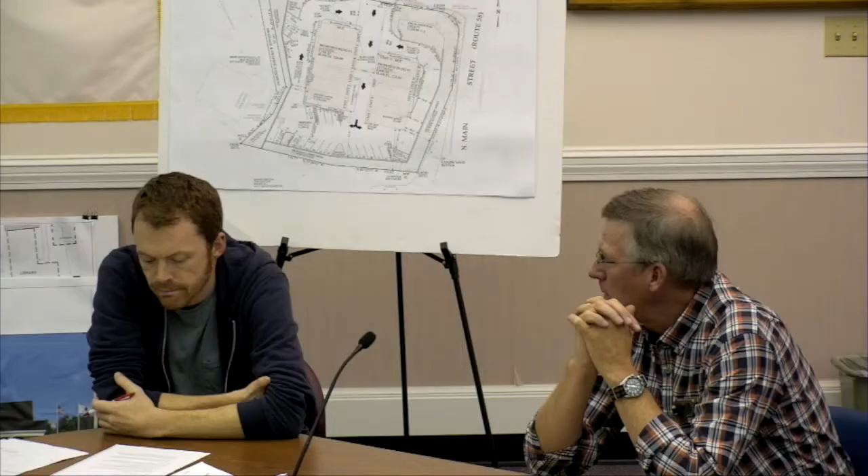Good evening, gentlemen. Good evening. Bob Kroll and Chris Leamy, drafter designer for Duxbury Construction. Do you have—I know that we walked and did a site visit last week. Yes, Jen and I were out there with you and Jim.

I know, Jim, you said you just received some comments from Andy Glines. Right, there are some final comments. Everyone now has a copy of that—it was the top letter on the packet that I just handed out. It basically consists of recommendations and stated waivers. There are no more technical corrections to be made.

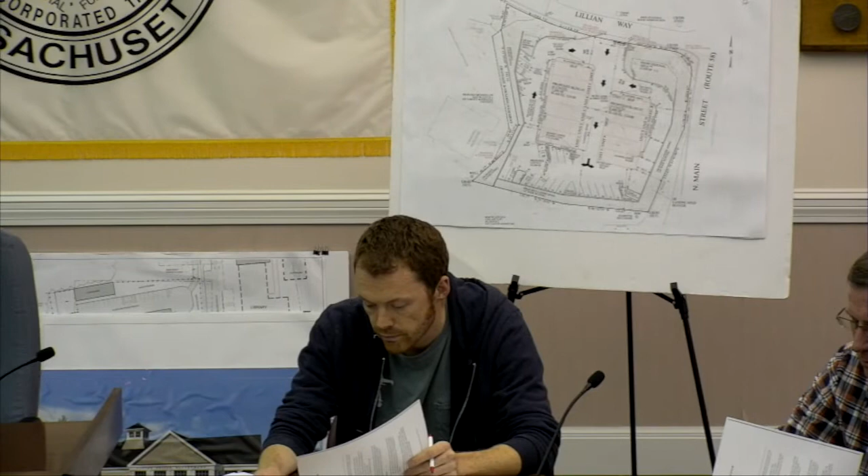Can we vote on anything tonight with this? We only have 3 members since Will is... Right, so for site plan review you're allowed to have 3 members, a majority of the board present, and vote on it. And you have to have at least a 2-1 vote in favor to pass something. Okay.

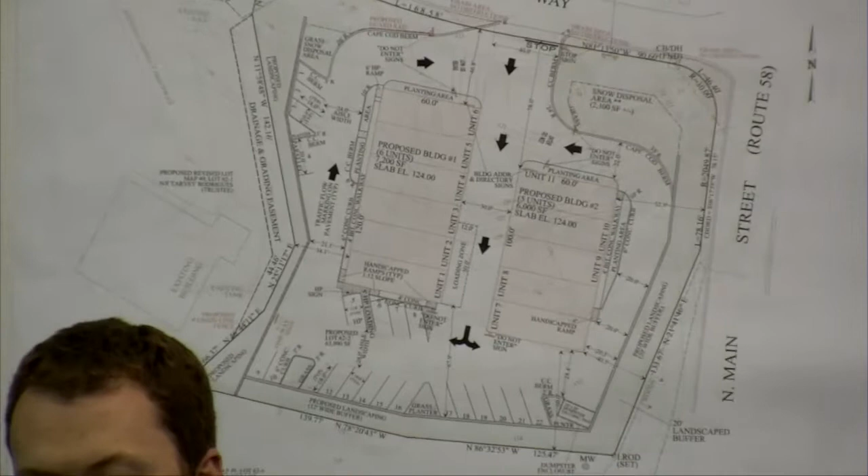All right, is there anything you people wanted to say tonight? You can just talk about the changes you've made to the plans. Exactly. So last time we met, you got a feel for the project during the site visit, and the one thing we took away was that you wanted beauty on the site. So outside of a few technical things Fuss and O'Neill pointed out, we had the landscape architect add more vegetation between the trees on the frontage areas. The trees proposed didn't actually fill up the space between the trunks, so you'll see on the landscape plan I attached for all your packets, all kinds of different vegetation proposed between the big trees on the frontage sides.

And then we also got them to update with plants that grow to a more suitable height on the two abutting lot lines.

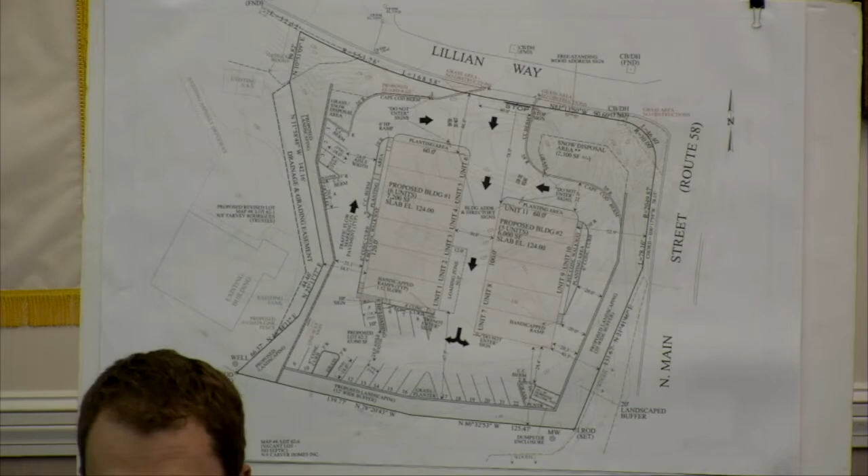So those things should grow to about 8 feet, and when you add in the slope and the retaining wall, there will be about 11, 12, 13 feet of building showing to anyone looking in, but we feel it's an adequate amount of screening, despite not having giant, big evergreens there. His reasoning was he can't actually plant those size trees on a 2-to-1 slope.

That's why he chose deciduous shrubbery and stuff to go on the inner lot lines. That's the biggest fundamental change since we last met. Everything else has just been correcting typos and adding bits of info here and there.

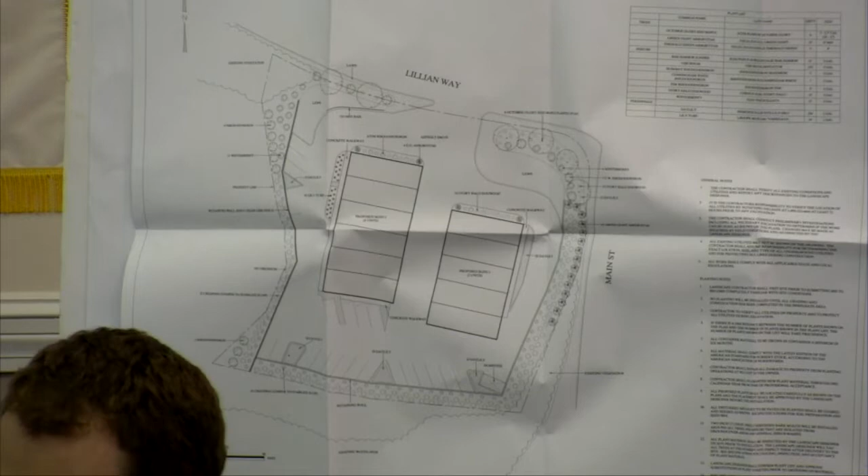So we have rhododendrons, winterberry shrubs, viburnum, creeping juniper, and out front we have red maples. And then we have a lawn in the back.

Any questions by any of the planning board members? I'm not an arborist, so while I recognize the names, I don't know what they look like. Do you have images of what these things look like? I don't have them with me, no.

Maybe, is there a concern that you'd like to have addressed? Really, it's just the visual, like you had said, filling in between the trees. But I don't know what these circles look like. I would like to assume that you did it, and it looks like you did, but without knowing exactly what each circle is. This was actually done by a landscape architect, not me, just in case there was confusion. We outsourced it to him and trusted him on it and his visual and aesthetic expertise.

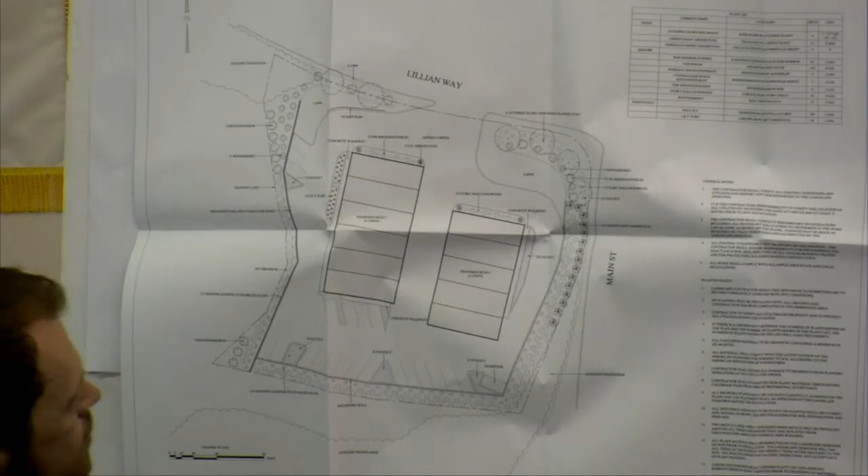Obviously, they said it. And same thing with the emerald giant greens, emerald greens, those are the green trees that kind of taper up. They're a little bit rounder at the bottom, and as they go up, they kind of go up to a bit of a peak like that. So they're good coverage. They have 15 of them. I don't know, I'd have to look at the plan to see where they're using them. Where specifically are they? They're on the side over here.

We're on the Main Street side. Yeah, I see that. So that's good for the street.

Now, did we have any neighbors that we were concerned about that were going to see any of this? We do have one - it's just another commercial building, used to be the old fiberglass building. You have Main Street, this is just Woodlands in back, this is Carver Glass here, and this is Lillian Way here, and the first driveway is further up the street. Then there's a commercial building across the street, it's a medical building.

So where they have the 15 green giant arborvitaes, that's going to be pretty solid. Now, where the breakdown with the 12 daylilies and the ivory halo dogwood - dogwood is the one that's got those berries that are falling off right now and smell good. So in the springtime, they have pink, red, and white flowers. They're more of a tree.

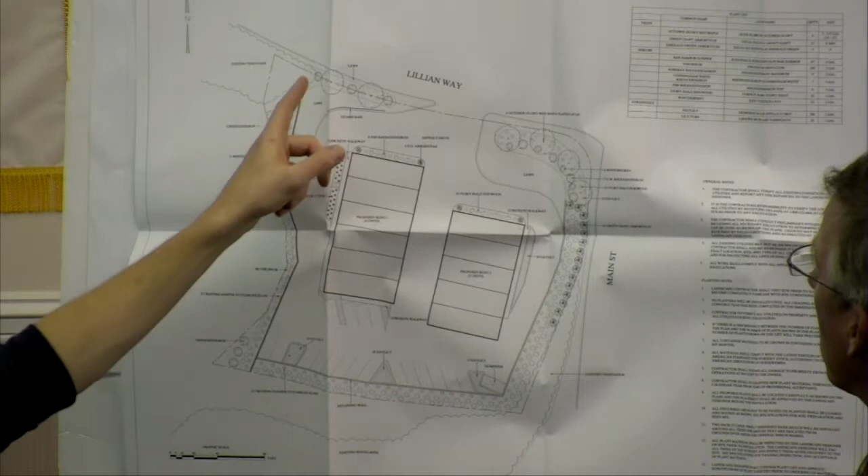I mean, is it going to go dead completely? Is it the kind of thing where there's not gonna be any green as soon as a good heavy frost hits it? From the street, it goes up, and then it goes down, there's like an embankment, and that's all gonna be flattened out. And it's also along Main Street too - the bank on Main Street and the bank on Lillian Way are gonna be removed. So that's why they proposed these plantings there.

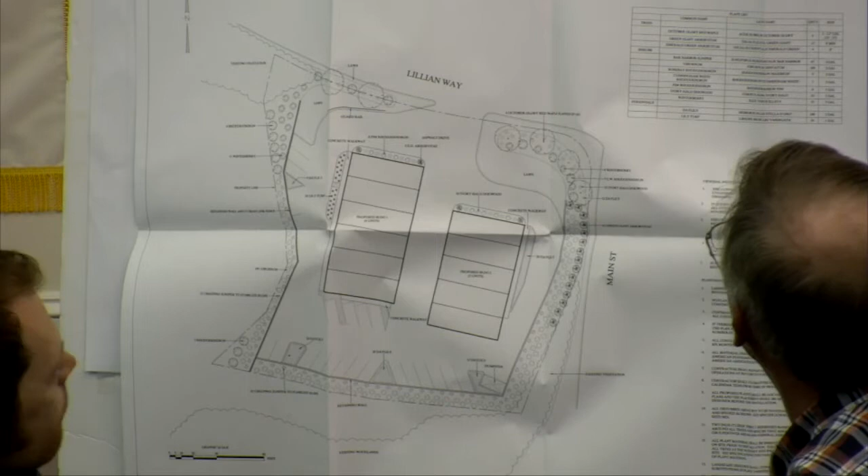So I'm assuming that on that other side, you are putting the red maples, those are the two larger ones? Oh, yeah, yep. And the rhododendrons - so you'll have 3 rhododendrons, and then you'll have the vegetation area. And in the vegetation area, Jen, on that back corner, they're gonna be putting more rhododendrons, which are the purple flowers or the pink flowers.

Large white flowers, about this big, they come up late spring - some of them come out late spring, but for the most part, early summer. How tall do they get? They can keep growing. Right now, they have them as 3-gallon pots. So a 3-gallon pot's probably gonna be about this big, by about a foot deep.

There is a couple - there's a PJM rhododendron, it's a 5. PJM will come out in the spring. So PJM rhododendron would be an early flowering. Rhododendron is the same family, but that's later. So that's gonna be good.

You'll have color in the spring, and then it'll go into color in the summer. Again, you'll have the winterberry that'll retain most of its color through winter.

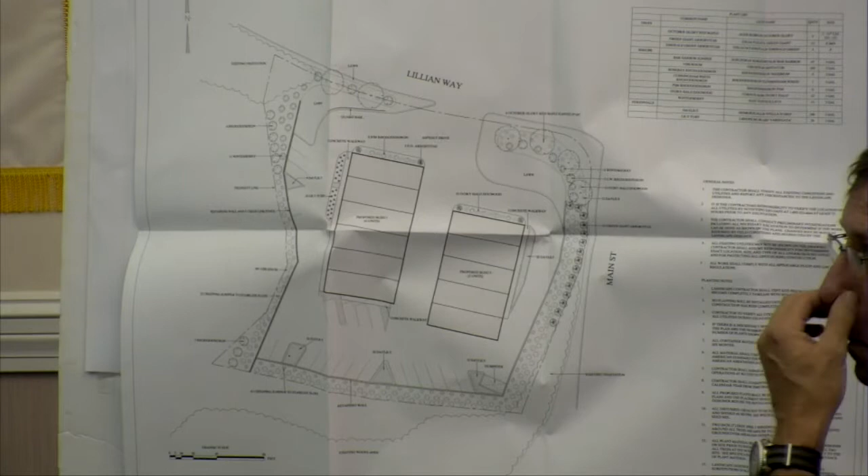3-gallon pots could probably be about from the ground to about right here, if they're of good quality. They come from a landscape company, they'll be decent. You can go to Home Depot and Lowe's, and I'm not knocking them, but they're not gonna be as full.

So with the 2 buildings being very industrial, what they have proposed, does it soften it? Does it make it fit a more residential area better? Oh yeah, it's very colorful. Most residential homes use arborvitaes for hedges, for privacy hedges. They have Japanese maples out in the front corners of their house for color, because they're that really dark purple color. And the rhododendrons are a number of different colors. They can get giant and out of size, but if kept dwarfed and maintained, they can stay very nice and full.

So driving by, it will look decent. Driving by on Main Street, you would drive by this property and think, wow, that's beautiful, that's attractive. This particular section where they have the green giant arborvitaes, for the most part, if they have decent ones, they're gonna be 8-footers.

We just did a hedge. We put 10 in 40 feet. So what is that, can you give me an idea what the distance is from the corner to the end?

From which corner? From the top, say the front off of Main Street. Yeah. See where the first one is? You've got 3 that turn, and then they go right down across Main Street. What scale is it? I'm lost. Yeah, what scale is it?

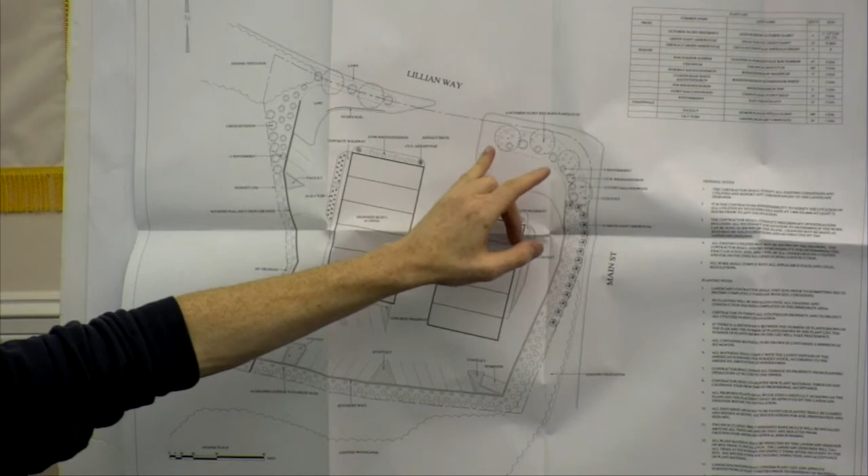Yeah, I'm just, see where you have 12 daylilies, and then where you have just above the existing vegetation, about how much space is that? 60 to 80 feet. You see what I'm talking about right here? That's 20 feet. So what scale is that to? It's 20. So you get 20 feet there? So that's 100 feet.

So these are going to be a little bit sparse in 100 feet. You have 15, you cut 13 because these 2 are on the corner. Right, so 13.

The green giant arborvitae grow 14 feet wide and 30 feet high. Yeah, looks like they're about 14 feet wide? No, well, they're about 7.5, 8 feet apart. They fill out over the course of 5 to 10 years, could fill out another 8 to 10 inches.

So it's going to be open, but it's not going to be open and you're not going to notice it driving by. And the 2 front corners of their entrance look nice. They have low cover, they have medium, and then they have the attractive Japanese maples.

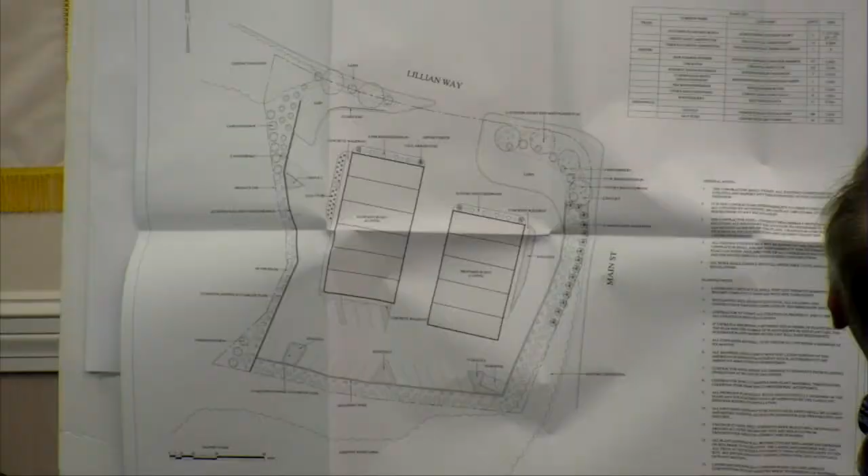Plus, I think you have a flowering dogwood in there as well, right? Which would be the ivory halo dogwood. You have one on the right corner, and I believe you have one on the left side too. I thought I saw one on the left side. Yeah, I think they are under the two big trees, under the drip line rather.

It says 23. Yeah, so I think you get, do it. I mean, I didn't walk it with you guys, so he just gave me an idea of the space between where the last dogwood's gonna be all the way down. You just said it was about 100 feet.

Yeah, so if you've got 15 of them, right now you could probably put your arm around them, so they're gonna be that size. So if they're 8 feet, the root ball's gonna be close to 200 pounds. That's a pretty decent-sized tree, and they do grow fairly quick.

So is there gonna be, do they have a recommended drip line in there for those when they're first planted? I don't know about drip line. In terms of what's required or in terms of what he's proposing? Well, in terms of putting the money into putting that in, and then just, you don't want them to die.

What is the guarantee that they're not all gonna die? You could lose possibly one or two, but I don't know if you're gonna have any kind of drip line in there for them. Okay. I mean, those trees can be almost $290 a piece.

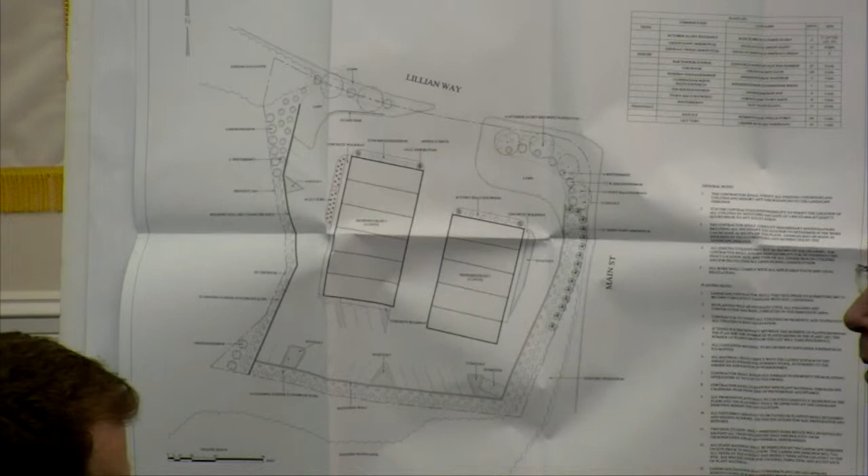Kevin, can you look at number 15 on the bottom right corner? The way I interpreted it, number 15 down here says the owner reserves the right to substitute plant selections with plants of similar character. If similar character is okay as long as they haven't changed it at all, for instance, the green giant arborvitae and the emerald green arborvitae are almost exactly the same unless you're a professional and know the difference.

That can't change because it has to be the same species, I believe. Sometimes when you're ordering things, they don't have it, or you want to plant it and get something. I think what she's trying to say is, if a plant isn't available, something similar has to be similar in size. I'm uncomfortable approving something with that in there, saying we're approving this but we totally changed the plant.

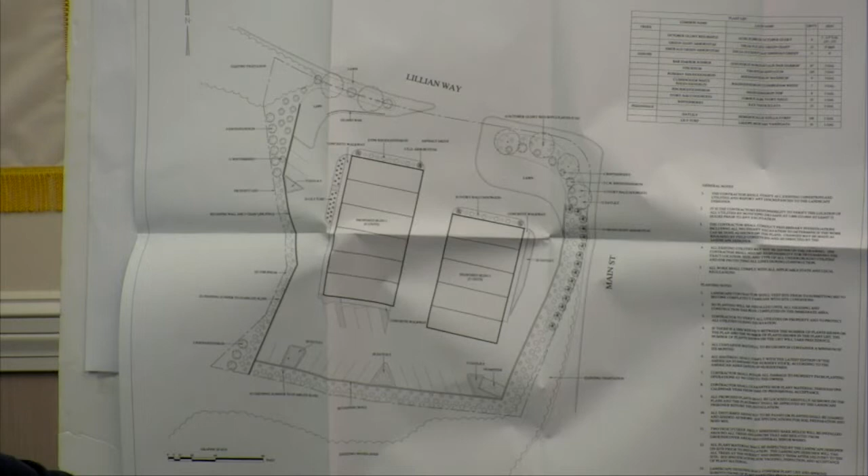It says it's supposed to be someone... well, similar is very subjective. I appreciate Kevin's analysis, so if something was going to change, I would want to hear from you again, or know more about the plant, because what you just said was very valuable to me.

All right, so could we strike number 15 and continue on? You can ask them to strike number 15, and that way they are subject to put in what they have put down here. But what they're saying is, they may not be able to get 15 of that particular one, or they might not have 15 good-looking ones. I don't know if we have the right to tell them to wait until they get it, or try to find it somewhere else, but I think what they're doing is looking for something close to a substitution.

It has to be similar size-wise. I just did a condominium site plan in Hanson, and the landscape architect I used would call out something, but he'd give me 4 other options in case they weren't available, and they were all similar, and that's what we would do here.

So I think what Jen was hoping for is it would be more subject to our condition, to make sure that they're going to be the same, that you're not just putting in what you want.

I understand exactly what she's saying. She's hoping that the way it's written, we agree to this, and then something gets substituted that's far less quality and growing potential. You said a dogwood is pink, similar characteristic, I'll take a little pink flower. Technically it's the same characteristic, but I just don't want to bait and switch.

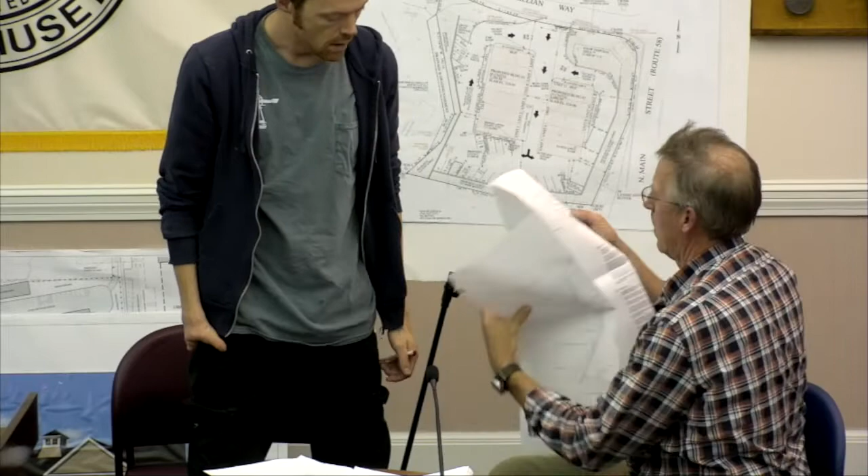If you look at the left side of the driveway, you'll see those plants more or less centered on that dashed line. Originally they were about 5 to 10 feet in, and it possibly threatened to disrupt a drainage swale that we had there where stormwater was flowing into. The roots would impact all that, so they just said, to be safe, can you slide it out of that area? The best we could do is have it straddle the lot line, because we have essentially no room to play with there for landscaping.

So then we wouldn't—you talked about that condition? That area was like an easement, and that's where they're gonna ease the water into. So what they didn't want is for that to be blocked. So Fuss and O'Neill addressed it, and then they changed it on their landscape plan. Got it, great. And then they gave us this updated memorandum tonight, right? This is what you just handed us back. Exactly, and all the plans, if you care to go through them all, actually reflect that too.

It should be on there, yes. So that's shown on that one? Yep, okay.

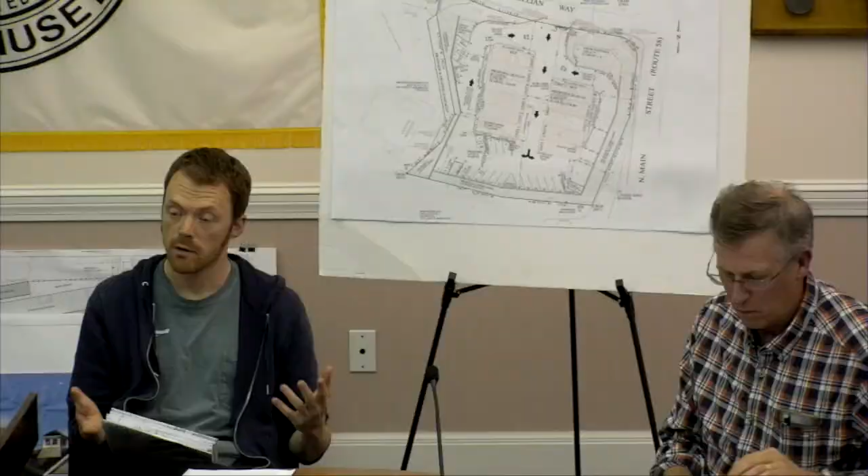Fuss and O'Neill has looked over the lighting plan. Apparently there was a change - I think the applicant included a lighting plan to it. Originally, I think the pole was lower than 14 feet, but on the new plan you're showing it's 14 feet. It was just an oversight. We proposed 10, we actually weren't thinking straight - we weren't thinking about vehicle access and clearance and stuff. So we chose the highest pole available under 15 feet, which is the limit according to the Carver regs. Everything will be mounted at 14 feet now on the lamp posts. If you're looking at the lighting plan, it'd be whatever's labeled LP.

Now these lights, are they going to be lit at night or just during hours the building's in use? Lit at night. So it'll be lit all night long? Yeah, we addressed that last meeting - someone in the neighborhood had asked to make sure, for security reasons, that we had the light on. We're not opposed to it. I want the buildings to be safe, and I want the neighborhood to be safe too, obviously.

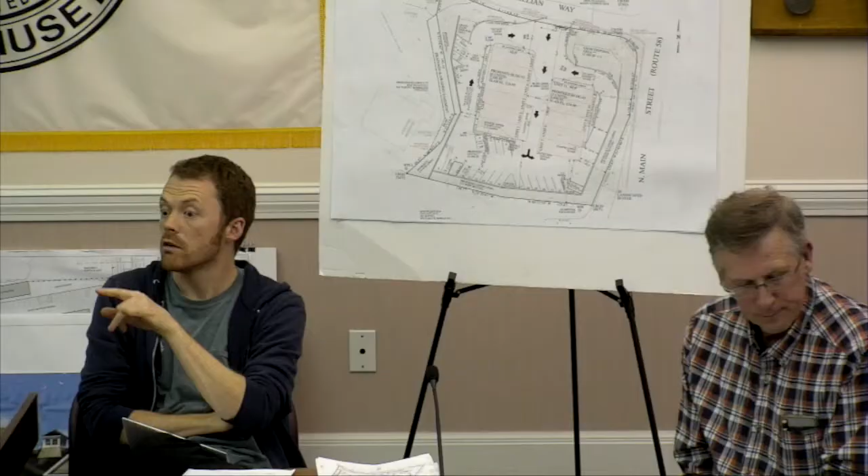All the lighting would be directed towards the buildings, so there'd be no spillage to the neighbors. Yeah, they're all calibrated that way - they have certain directions and certain angles to hit, and these seem to satisfy all that. The lighting plan will also show an approximate photometry layout if you care to look. They all shoot out in one direction.

Do we have hours of operation? Normal business hours, that's what we're basically saying, for contractors and trade. Some of them start earlier - I can envision maybe 8 o'clock, could be a little earlier, so probably 5 to 6 p.m. It's people just coming in at the end of the day, dropping off maybe a truck. I don't foresee anybody starting too much earlier - an electrician isn't going to someone's house before that.

I mean, I know - I just know there's an electrician in the house at the moment. Yeah, I know, this is an emergency type situation. Okay.

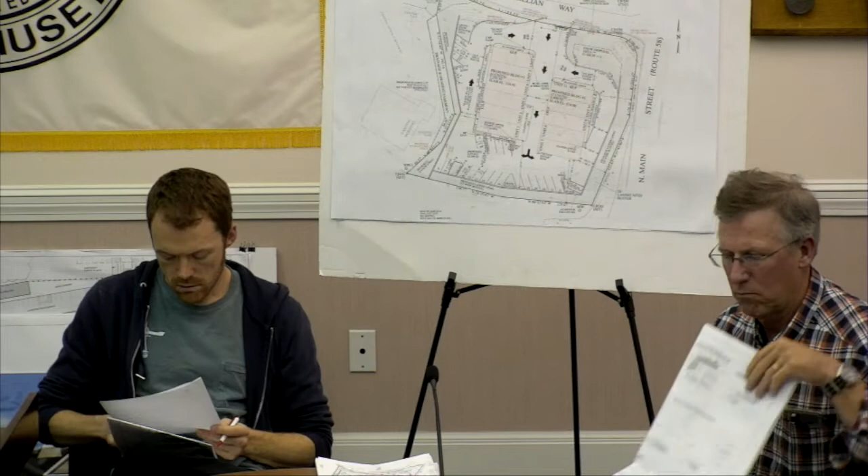All right, any other questions? Is there something you want to say, Jim? So I just wanted to - there were some waivers requested. Do you want to go and cover those waivers? Yeah, absolutely. As long as everyone has the letter open, the first one we talked about last week.

Engineers were requesting locations of individual trees that had a 10-inch caliper or larger. That was existing stuff - we just thought, you guys know exactly what's happening with the lot. We basically proposed to clear almost all of it, save for tiny patches here and there, and we're planting stuff where it's asked of us. So in light of that, we're asking to forego an entire day of surveying work to locate all those trees. It's extra cost incurred on the customer we're working for, just gets passed down. It's all going anyway - you guys have seen the limit of clearing, those who made the site visit, so you have an idea of what's actually happening. I'm not sure if locating individual trees would provide any more insight.

Fuss and O'Neill reviewed that and recommended approval, subject to maybe having the planning board desire those trees marked prior to being cut. But you're looking at mostly the trees you're going to cut are within the site itself, where you're doing clearing for the buildings.

But you're not touching any existing trees on the perimeter of the site. There is one area on one of the inner lot lines, opposite of Lillian, so in this case it's the bottom of the plan. We do have to clear a little bit to safely grade out there, but right now the land is commonly owned, so the owner is completely fine with us doing a little bit of clearing to get additional grading, so it doesn't go from moderate grade and then jump up as soon as we get over the lot line. It's simple construction, I suppose.

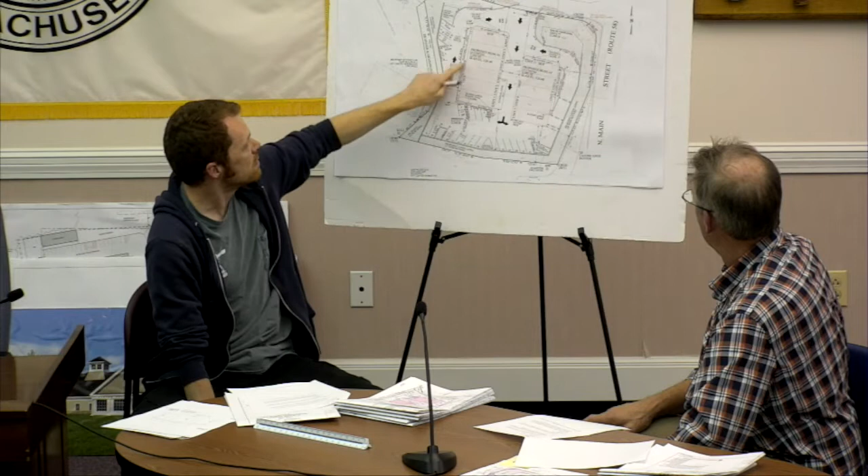And then the next one, waiver section 3251, is that still? Yep, we'd still like a little bit. We weren't able to do it everywhere for the entire stretch of the building. On the Main Street side of the smaller building, we had to chop a little off to maintain safe traffic circulation - if someone's coming around, doing landscaping on that corner is going to pinch where they make a turn, it's a little unsafe, so we truncated it. On this side, we weren't able to do it the entire way for the same reason - adding another 6 or 10 feet is going to mess up vehicle turning, so we made the decision to cut it in half. We're constrained in the interior of the site for traffic concerns, and there was previously none. We've added wherever we possibly could, added stuff on other sides, hopefully to make up for it. We feel it's an adequate substitute.

So on the larger building, at the Lillian Way side, how many feet are there? 60 feet on both of them, right? Yep, 60 feet of planting areas. How wide is the bed? I think it's 6 feet. Thank you - oh, this is 15 scale, just a moment. That's 30. Isn't that 6 feet? 6 feet, okay, so 6 feet there. And on the left-hand side of that building where you can do it, how deep is that? It's 6 feet deep, please excuse me. The length is about 60 as well. And then you have nothing on the inside, that inside driveway, nothing at the bottom of the building? Correct. And on the building to the right, the smaller building, you just have a little bit on the front and at the top of the building? Correct. And those are also 6 feet? Yep.

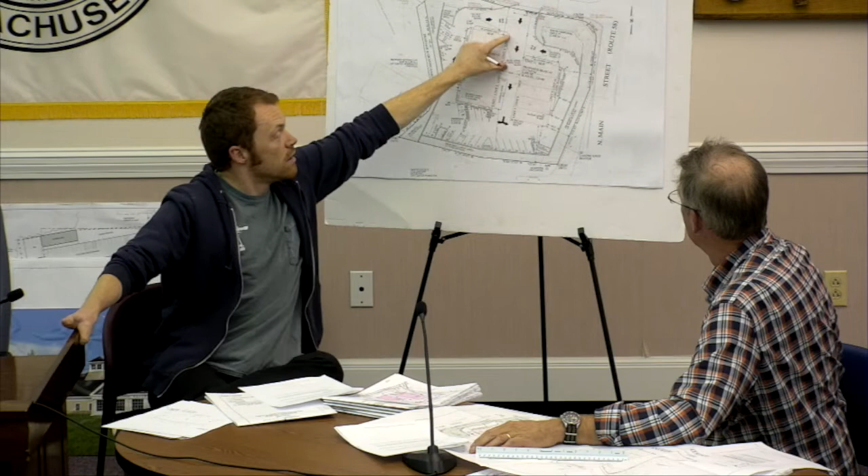And then I think you're also looking for waiver, section 3252, for loading area screening. That is correct. As we talked about in the previous meeting, it's just something we're not able to do - the site constraints make it like that. The loading zone, according to our customer, isn't foreseen as a super busy area with Sysco food trucks unloading all day. It's just going to be located here. We don't have physical space to enclose it. We pushed it from near the front of the site to the back. The truck comes in, stops, they unload, and back out. That's the best we can do. Is that area raised? No, it's just marked.

And again, there are no loading docks. Right, no traditional loading - it's going to have a garage door, an overhead door. So essentially, a future tenant would just pull their vehicle up, open the door, unload or offload, and it's all ground level. From the back or back and front? The middle alleyway there - this is where all the overhead doors are, on the inside.

And again, that was recommended by Fuss and O'Neill to approve that waiver. So was Fuss & O'Neill looking for screening at the 12-foot section there in the front, or were they looking for screening around the whole entire thing? Apparently the bylaw requires 10-foot landscape areas on every side that has a public entrance, and due to site constraints, they're attempting in some areas to provide some, and other areas it's really constrained by the driveways - exactly, because they only have 30 feet between buildings. And given the fact it's sort of in the center, they do have some landscaping where it counts, on the outside edges, and the edges facing towards Lillian. I think that's a good compromise.

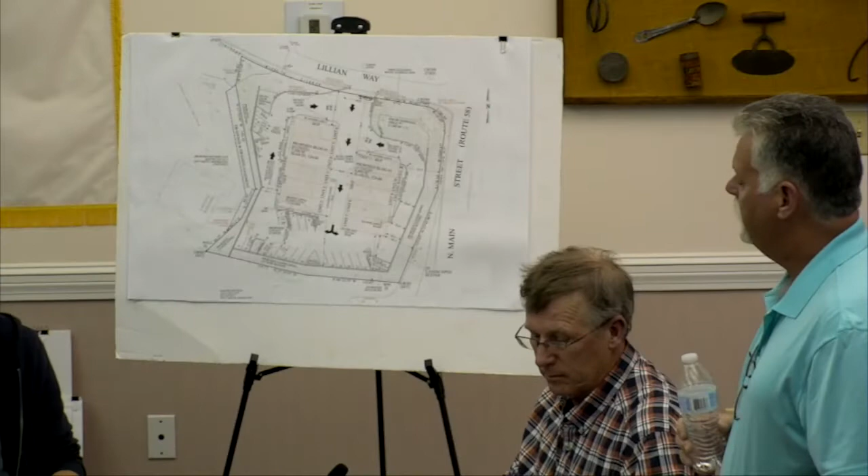Thank you, Mr. Chairman. William Sinclair, 5 Lillian Way. Could you guys describe to me your swale on Lillian Way - how deep it is and where it's exactly located? Sure, just a second, I haven't looked at the plans. All good, let me just find it myself. If anyone else wants to follow along, it's page 3, sheet 3 of 5, proposed grading and utilities.

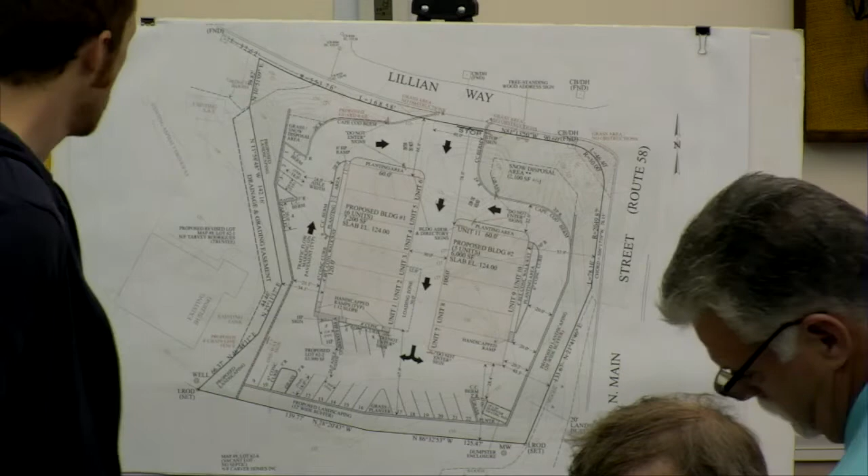There you go. So that's 120 and a half. You have - can you point out - 120, you have 123. So it's 2.5 feet.

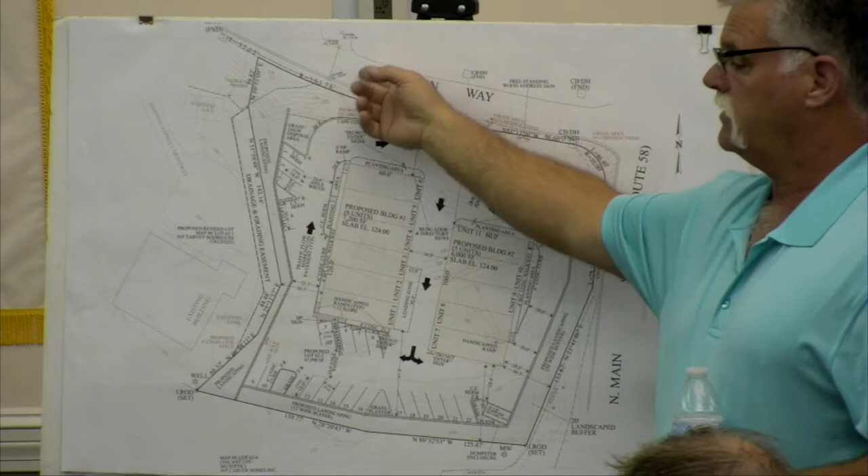My question is that this parcel, this area of the street, during high rain, winter and stuff like that, floods and ices up a lot. Present conditions, it ices up a lot. This professional building's open now, a lot of traffic in and out. We're taking more water - it's going to go to that swale. If it overflows onto that, that's going to be an issue, adding more danger to that part of the street. There's a swale, and it goes into the drainage system. The water comes out into here, goes into a 12-inch PVC pipe, connects and goes this way. Also, there's a trench drain right at the street line. You got it - that was my biggest concern, for safety. Okay, thank you.

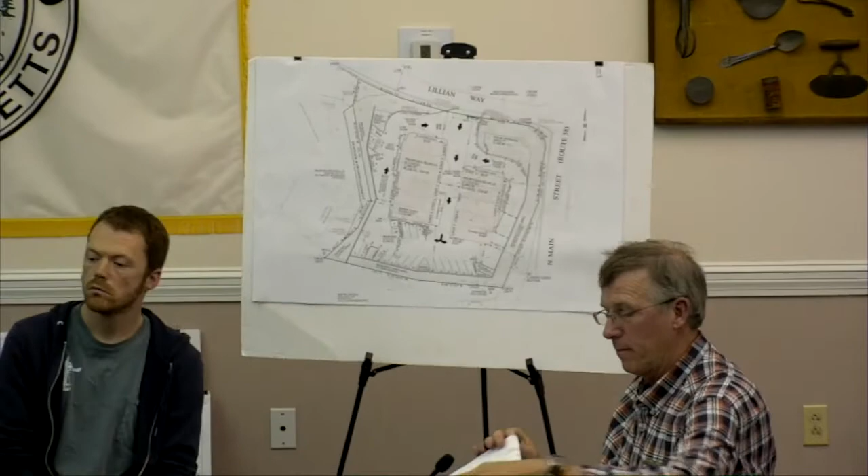So because there's a bank there right now, the water used to flow down the bank onto Lillian Way and cause some puddling out there. But now that bank is going to be knocked down and you're going to have a swale there. So I see the catch basin rim in that area is 120 - elevation 120. So what's the bottom of the swale? 120 and a half. Okay, we're looking at sheet 3 of 5 here - you should see a mark in the center of the swale that says plus P 120.5.

The rim there for the catch basin is 122.30. So that's higher, meaning it's going to drop into the 120 and a half. Well, the pipe's set at - that's at 123. The swale is 120.20, so that's the low point in the swale. And then it goes into the catch basin at 119.87. So the swale will fill up and go into where the catch basin is. It'll go through the grit chamber, through a manhole, and into the leaching chambers. Okay.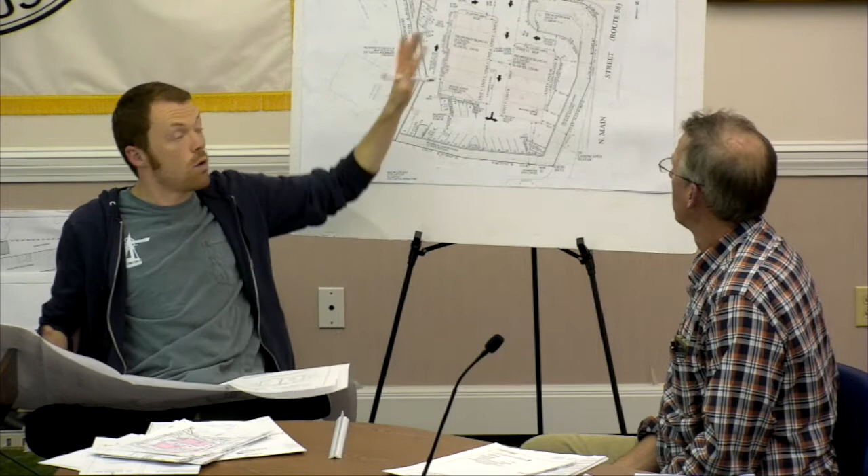It's not really related to this, although there are trench drains and catch basins that can accommodate more overflow if needed. So it's actually gonna improve the conditions of the street? Yeah, at least for water that's coming from that lot anyway.

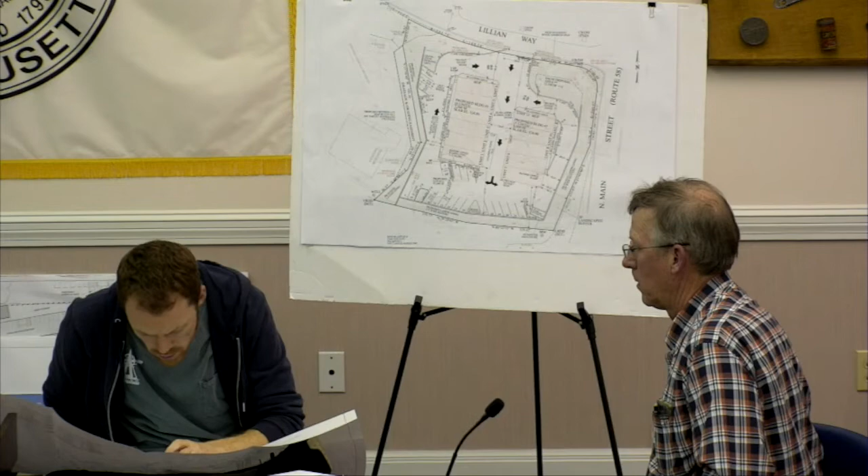And then, which way is that driveway sloping? From Lillian Way, is it sloping down? Well, of course you have to drive up a little bit. It's 123, about where you start driving in, is what we're proposing. Can't barely see it, but yeah, you'll be going up about a foot from Lillian Way.

If you're standing in the center of Lillian Way, it's about 122. So the minute you walk onto our lot line, you're already on the way to 123. And by the time you make it to the site, it's 123 and change all over the place. So it's, I'd say, 1.5 feet on average increase from that driveway.

So will water be coming out of that paved area and flowing out onto Lillian Way? No, we have a trench drain out there. Okay, all right.

What's that, at the entrance? Yes, so that captures the water. It's labeled, the trench drain was on sheet 3 of 5, right? Yes, sheet 3 of 5 shows it. So that captures any water going off the site, goes into the trench drain, and then into the drainage area there. Yep, okay.

So it should actually improve that condition. Or at least not make it any worse than it is. Right.

All right, anybody else in the audience have any other questions? Well, seeing none,